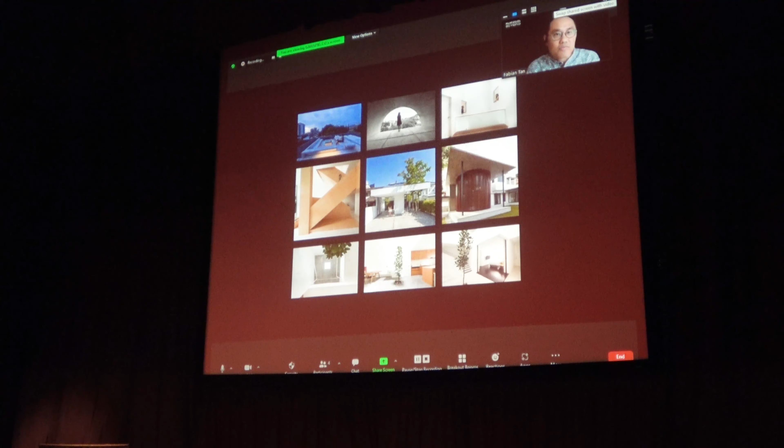Basically, we are Fabian Tan Architect. We're a small architectural firm in Kuala Lumpur, and we do unique residential designs. We've been going about 9 years strong now, so we're still going okay.

But before I share my works, I'd like to go back to before the formation of Fabian Tan Architect, or short form FTA. Basically, back then, when I was working for others, I had the innate desire to express myself, and what I did was actually art as a hobby. So art was a sort of expression that I needed to do, and also to explore and find out more about myself.

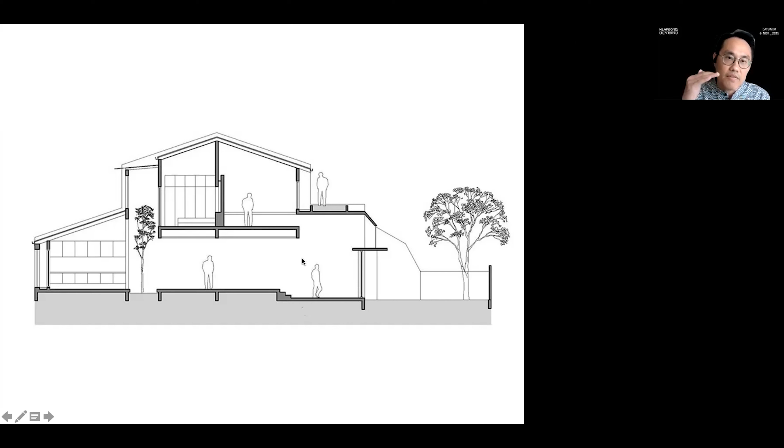So the house in section is a linear open concept, if you can see from the living, dining, and kitchen area. If you notice, the living area is slightly lifted so that it has that invisible transition between the first floor and the ground floor.

In terrace houses, you usually get light sources from the front and the rear. This is not a new concept, the courtyard. The courtyard has been embraced even in Malacca shop houses, where they bring light into the middle of the house through some form of skylight or opening, or in this instance, a tiny little courtyard.

As I just mentioned, on the left-hand side you see a computer table. It's just a table, or you can use it as a computer table and a reading table, with a level difference associated with it. You can also take a couple of steps, step ladders, to go up into this little patch of green that views the surroundings.

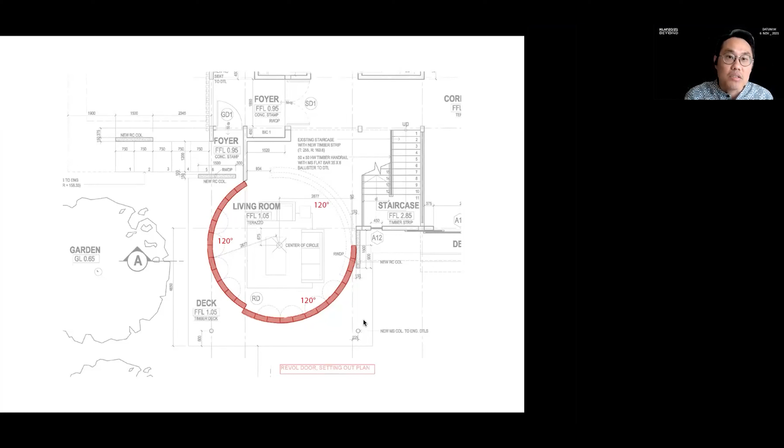But there is a strong intention behind the revolving door, and there's sort of like mathematics behind it. Imagine a circle divided into 3 parts, so you'd have 120 degrees each. But if two of those parts overlap into a single part, you'd get an opening of about 240 degrees, which is more than the periphery of your eye, around 180 degrees.

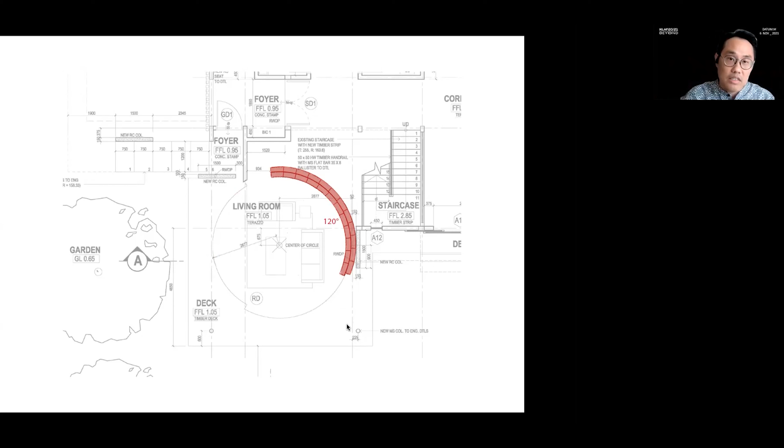In other words, the intention was to make the living room feel so openly connected to the garden that the actual space inside the building is already the outside, and the outside is inside. This is represented through that opening.

There's also a very strong intention behind the timber slats and the panel that you see open inside. The timber slats are meant to cut down glare but also provide security at the same time. The panels are openable for obvious reasons like ventilation, but I also believe they're open at both the bottom and top panel for glass cleaning.

With a normal terrace house typology, usually it's a 2-story house. You'll have the car porch and living areas on the ground floor, and usually the dining area and the dry kitchen or kitchen area is quite dark in the middle. Then you move up this series of staircase, and once you reach the top, you arrive at a kind of family area. This family area is actually not required, but it's there for a reason.

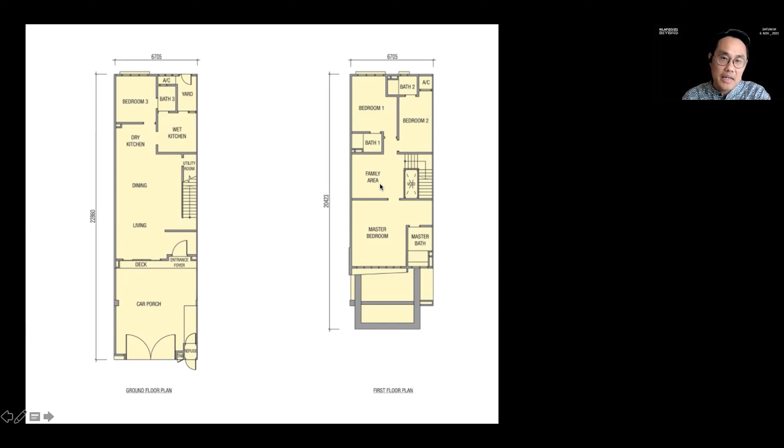It's there to connect the bedrooms together, the master bedroom in the front and also the two bedrooms at the back. And you hold on to the idea of the family area, which I'll explain to you next.

I've thought about the terrace house typology in that manner, and I thought, why does the terrace house typology have to stay the same all the time? So what happens is I actually reverse the typology, as in I put the bedrooms on the ground floor and the living areas at the top floor.

And the corridor that connects to all of it can be double volume. Now, this can only be achieved if you flipped it the other way around, because the living spaces on the top floor, or the living, dining, and kitchen, can be open space and all as one, which I'll explain later.

But I'm very proud of this layout, because as you can see from here, it almost treats the corridor as though it's the outside area. And from this typical floor plan, it has 4 bedrooms with 4 ensuite bathrooms, and all the bathrooms are naturally ventilated by air wells. Yeah, I'm quite proud of it.

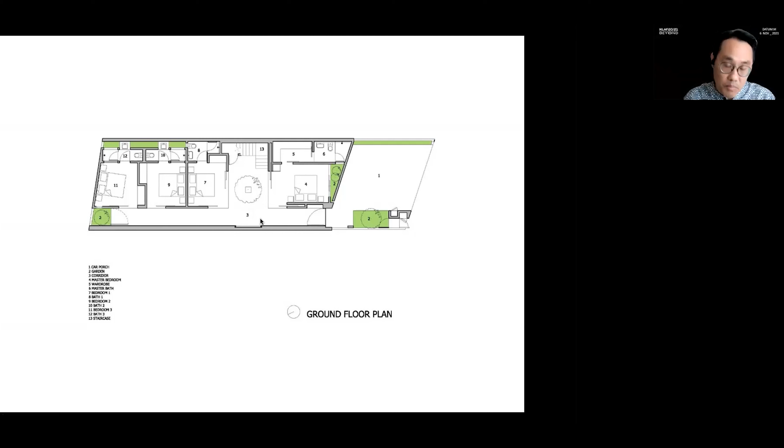The requirements of the clients require that they have a lot of bedrooms, because they have a lot of visitors that visit regularly. The top level has the living spaces and the rooftop garden deck with the dining and the open living.

From the outside, the house looks very normal, like a 2-story house. But as you go in, my client describes to me that when there are visitors that go in, they get a bit disorientated, because it looks nothing like a 2-story house.

It's also a very funny story behind this large door, which I put at the end of the corridor. Clients got very excited about this. They said to me, can I have a feature door? Like, can we clad it with timber, or have some kind of color texture just for it to stand out? Then I told him the door is actually not the feature in the house.

And he said, what is? I said, the architecture is the feature. So I managed to convince him out of going with that idea, and he agreed with me that we should go that way. So the large door at the end also has openings, and I'm quite cheeky sometimes.

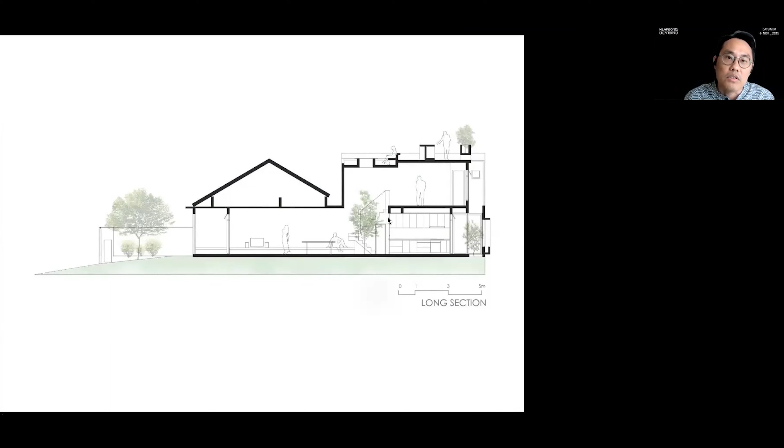The house has a linear open concept, with bedrooms on the other side, the first floor here, and the roof deck above. You can see trees and plants throughout the house, which gives a reminder of nature being present. So whenever you are in the space, you're always quite close to nature - you feel nature in your presence, and that's what we tried to achieve here. It's almost like a concept of framing nature, of framing spaces in that way.

And the intangibles of architecture are always there, I feel. We try not to look at architecture in terms of its hardness or obvious tonnage. Usually architecture is described by materiality, by walls, the things we look at every day. But I always like to look at architecture on the reverse side of it - the voids, the actual space, the proportion, the light, and the volume.

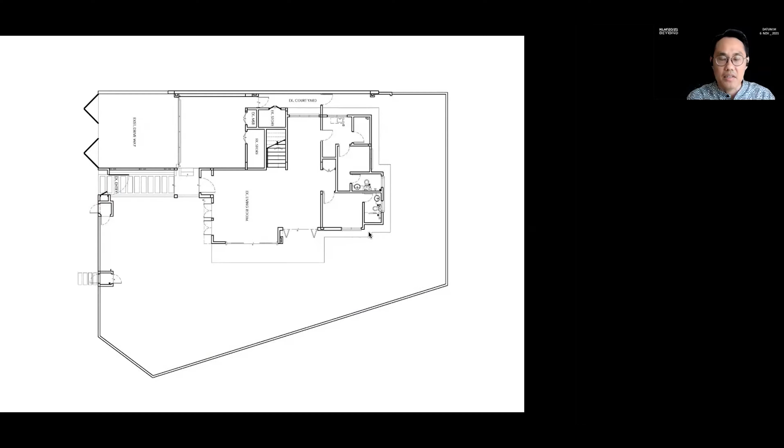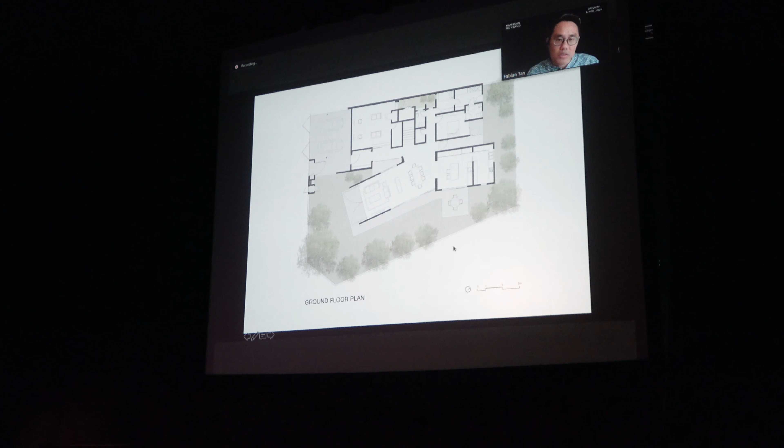So we decided to employ breaks, you would say. If you notice from this floor plan, we've inserted a pavilion that sits in parallel to the skewed boundary. But in doing that, you create a natural triangulated break between the original house and here. And we've also detached the kitchen from the original house to create a continuous corridor, which when opened up, brings in light and ventilation into the space, and also other corridors that give light and ventilation to the actual space.

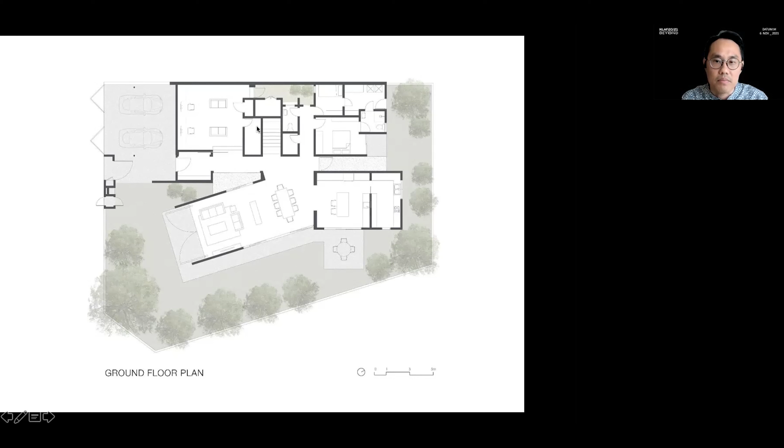The first floor plan has most of the bedrooms in their original position, and the inserted pavilion, which has the study room and the balcony on the first floor. And that's the plan from above, with the triangulated deck and the building in parallel to the boundary line.

Continuous corridor that leads right to the back, and the triangulated break. So the triangulated break gives layers of spaces.

In hindsight, maybe I was inspired by my travels to the Mulu Caves, which is an extraordinary cave in Sarawak. I've been to it. And it's a 100-meter cave, natural limestone cave. And

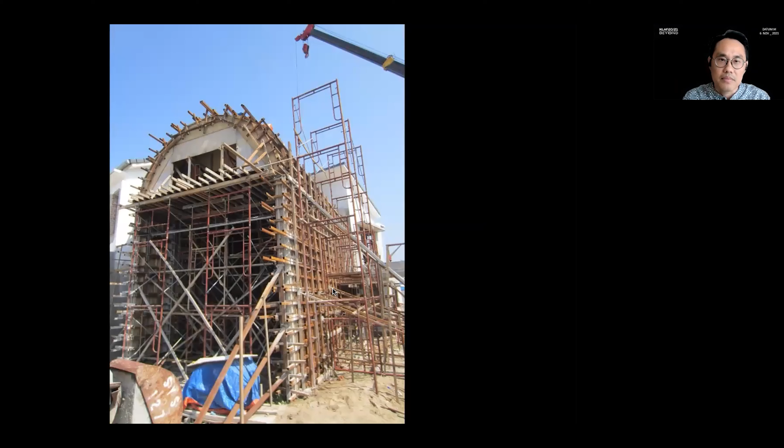The most challenging part about the architecture was the actual construction of it. And yes, we did do a single cast. And that's the result of that construction method.

The pavilion is made out of a series of platforms. If you can see from here, one platform is higher than the other — the balcony platform, and below the balcony platform is the living room, and below the study platform is the dining room. This difference of levels in section gives a different spatial definition, or different spatial hierarchy, to the actual space itself. It also gives some form of a vantage view among each other to elongate the space more.

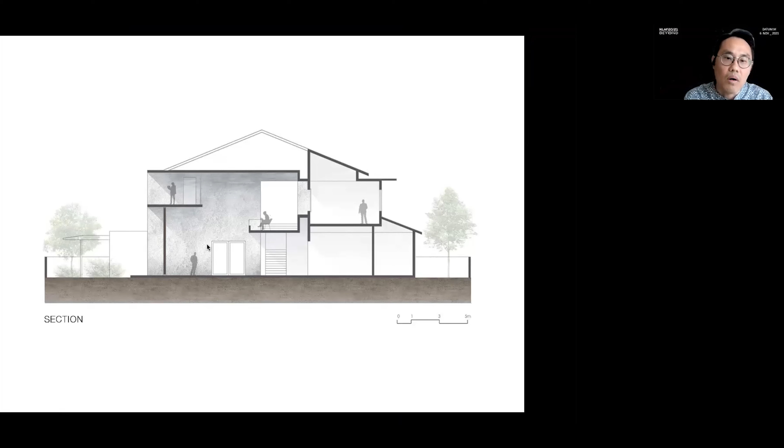And so it's quite evident from here, from the front of the house, looking back with the balcony at the top and the lower platform here.

At the end of the pavilion, on the living side, I've designed two large doors, and these doors actually open up and extend the space towards the garden.

These large timber doors are made out of pine. We chose pine not only because of its lightweight, but also because it lends a very interesting texture, and we stained it black. So when you see it from an angle, you can see the actual grains, and the texture of the grain is very interesting. Also, the handle of the door becomes kind of like a locking mechanism for the door to stay in place or to lock it when you close the door.

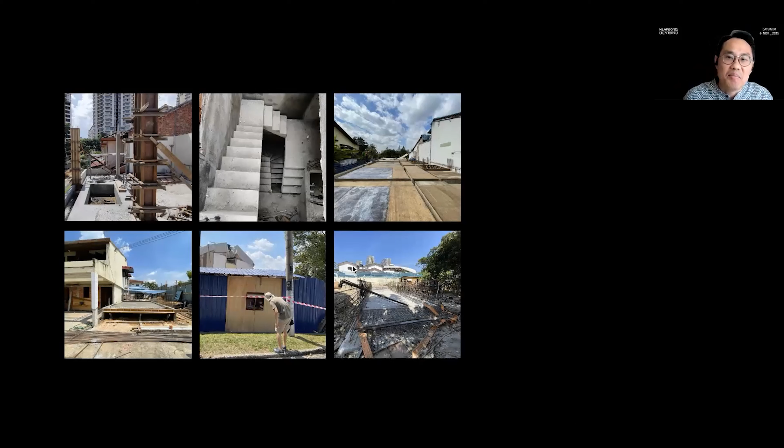And my ending is just a little poem. While you slow down, pause, breathe, reflect, and savor those fleeting moments. Thank you.